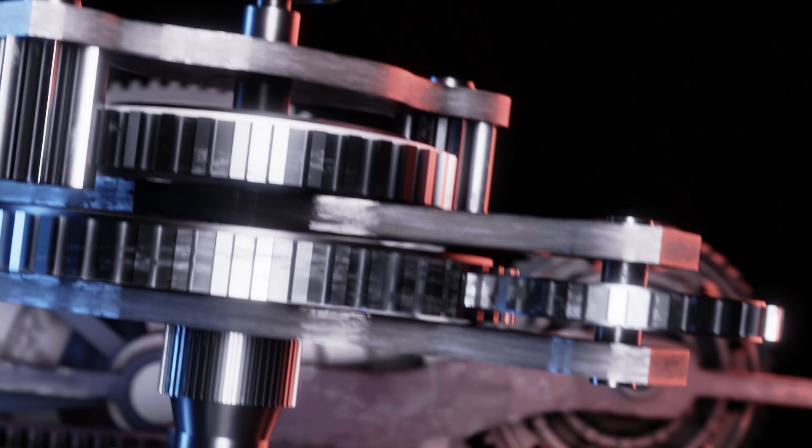There's basically three components to this kit. First is the gear cores. These are all the middle pieces of the gears.

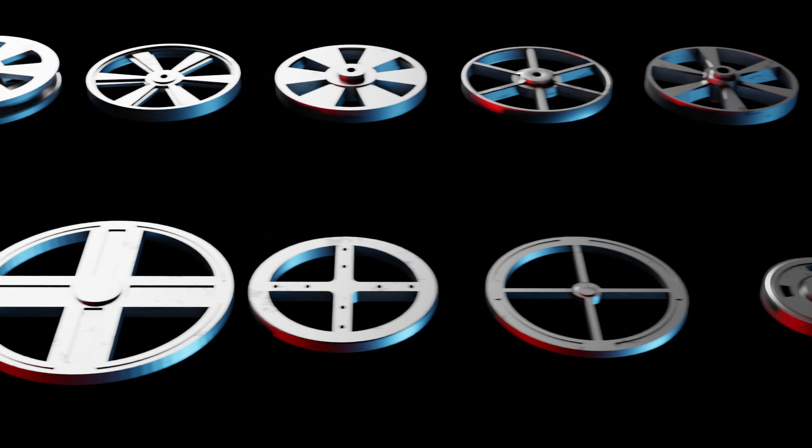I made a whole bunch of different styles based on real world examples that I saw online, and I added a little bit of flourish and fanciness to them to make them a little bit more eye candy. But a lot of these are based on real wheels and gears, with a good variety from sci-fi styles to old-timey gears as well. These are completely scalable and can be any size you want them to be.

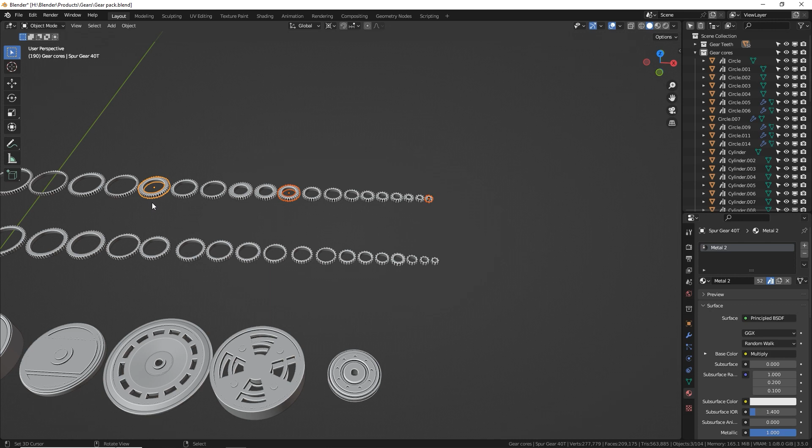Up here are the actual gear teeth. Now these are not really intended on being scaled up or down unless you scale all the teeth that you're using in one scene uniformly. We'll get to the why later. There is actually quite a bit behind gear teeth and how gears work.

So I have made a number of gear teeth here from 8 teeth all the way up to 100 teeth, and I'm going to make some other bigger ones as well for more building possibilities. These are the more classic spiked spur teeth, and over here are the more blocky, smaller square type teeth that you'll find in a lot of industrial applications.

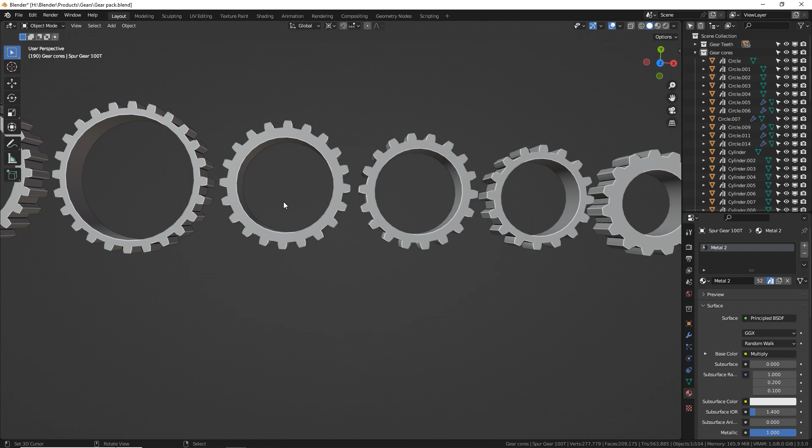So what you want to do is pick your wheel cores first. I'm going to grab a few of these random ones that I really like, Shift D and move them over here. And then I'm going to grab some teeth that I like, and I'll show you how to match them up.

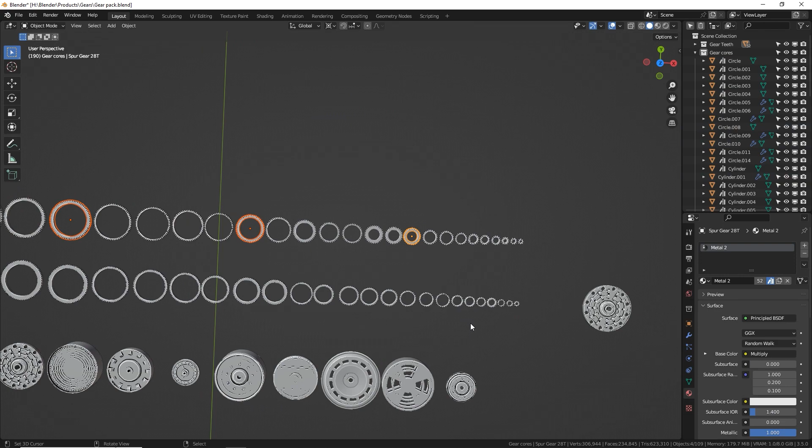I'm going to use the more classical spur teeth, so I'll get a 100 tooth, a medium one, and let's get a small one too. I'm going to Shift D and move these over here. Okay, so I'm going to be building a little gear train over here. Let's just line these up randomly like that.

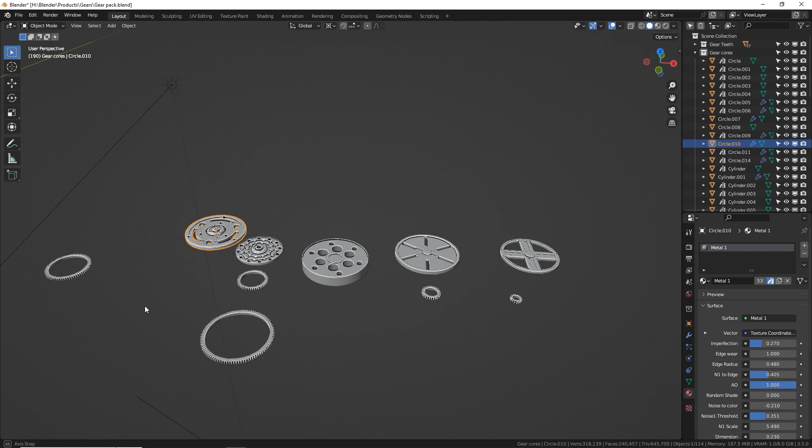Here are some really helpful keyboard shortcuts to help you get things lined up when doing this kind of work. First, you select your target, then press Shift S, and this handy menu pops up. I'm going to go to the bottom one, cursor to selected, so now my 3D cursor is exactly where this wheel core is. Now I want to snap these teeth onto this one, so with the teeth selected, Shift S again, and go to the top option, selection to cursor. Now the teeth I selected are exactly lined up with the wheel.

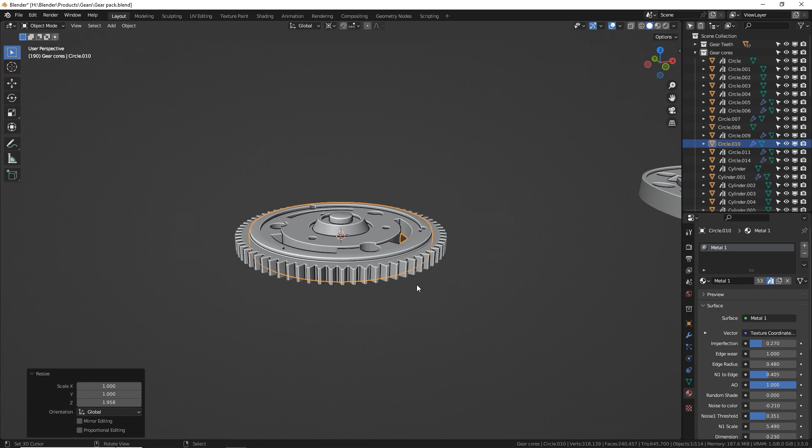Instead of scaling the teeth up like I said earlier not to do, we're going to scale the wheel down to fit inside the teeth. There we go. You can leave it inside, or you can SZ to have it pop up out like that, depending on what look you're going for. I'm going to do that a few more times to attach these teeth onto these wheels.

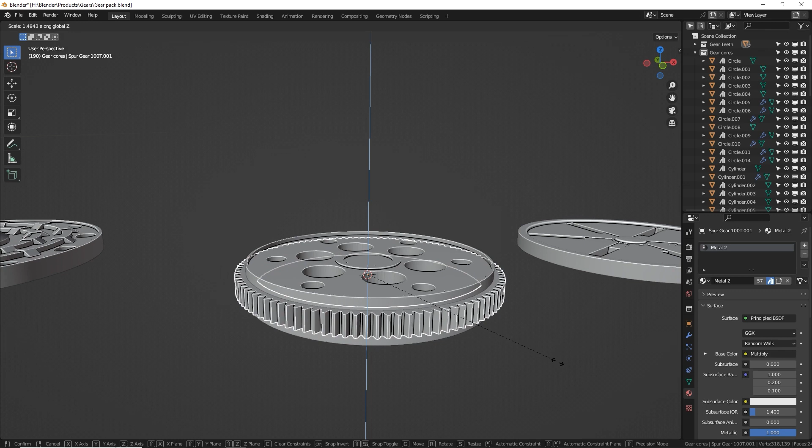Let's make this one the really big one with 100 teeth. So Shift S, mouse on the bottom to put my cursor there, select the teeth, Shift S, select the top one to put my teeth where the wheel is. Then I'm just going to scale my wheel down to match where the teeth is. I'm actually going to scale my teeth up as well, because I've seen on a lot of larger gears they have really deep teeth like that. It also just looks cool.

Let's do similar with the rest of these. I'll speed this part up.

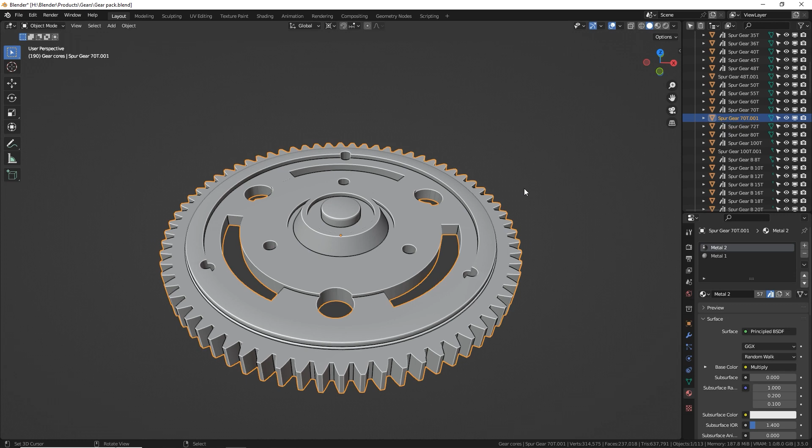Okay, next is we want to join these two objects together, the core and the teeth, so that they are one object. So I like to personally select the core and then the teeth. And when I press Ctrl J to join them, it keeps the name of the tooth object, which shows me how many teeth it has. So 70T, spur gear 70T right here. And also if I press period over here, it'll find it, spur gear 70T. 70 teeth, that's important to know exactly how many teeth you have for the math we're going to do in a little bit with drivers.

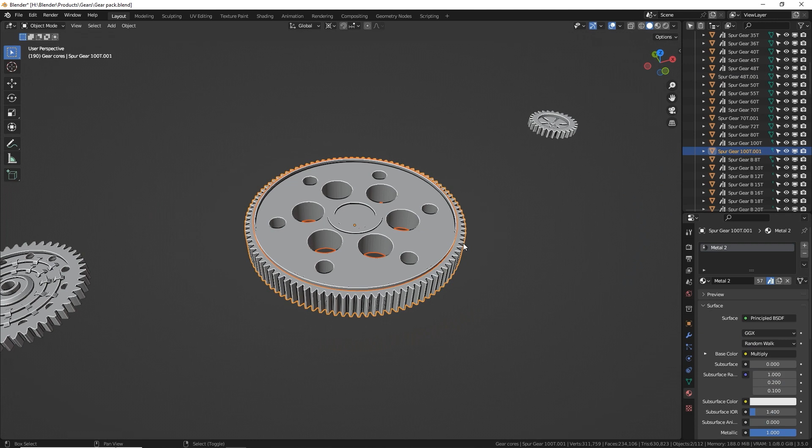It is so awesome and so much fun and so easy to get gears just working. And that's all I wanted to do, is make gears work, and I figured it out. So again, we select the core, then the teeth, Ctrl J to join. Awesome, and it keeps the teeth name. Core, then teeth, Ctrl J, Ctrl J. All right, okay, we have our 5 gears. Let's keep the 100 tooth one in the middle, and let's line up this right there, and there, and there.

Now, once we got them generally laid out how we want, I'm going to zoom in and make sure that the teeth actually line up. So we're just going to move it right there, and afterwards I would build, you know, like a framework or arms or whatever to hold these actually in place if that's what I was going for. But first, I do suggest you do the gears first and then build a framework around them. Or else you'll be doing a lot of extra work.

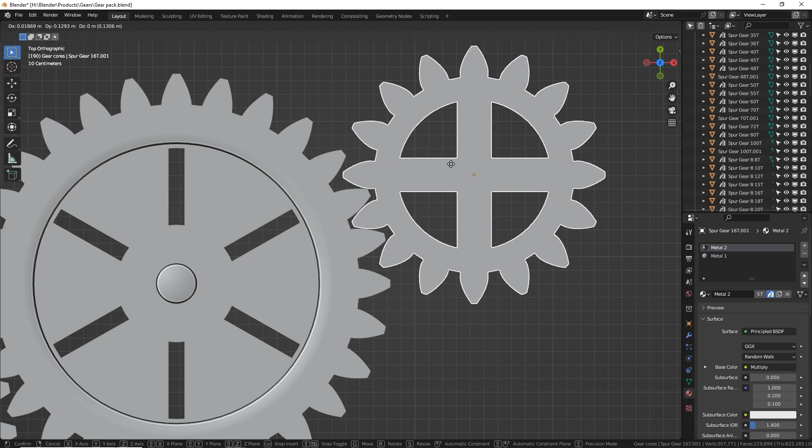All right, so let's automatically animate this as our driving main gear. Right? This is like our starting, where our motor would be connected, our input drive. And to do that, very easy, we're gonna animate it on the Z-axis, right? Because everything is flat facing upwards. Oh, we didn't line this up. Let's move that down, up, and up. Okay, so this is our drive gear.

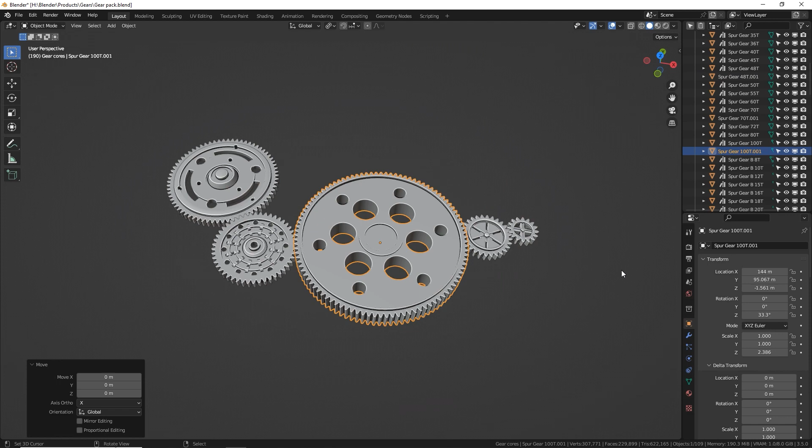So to auto animate it, we're gonna go to the Z rotation axis and type in #frame * .01. So now if we play our animation, it's getting each frame of the animation, frame 1, frame 2, frame 3, and multiplying it by .01, and that is the new Z rotation for that frame. So this will forever animate no matter how long I make this animation, whether I make it 5,000 frames, I don't ever have to do any keyframing or check on it or restart it. It'll just continue to rotate forever, and I love that.

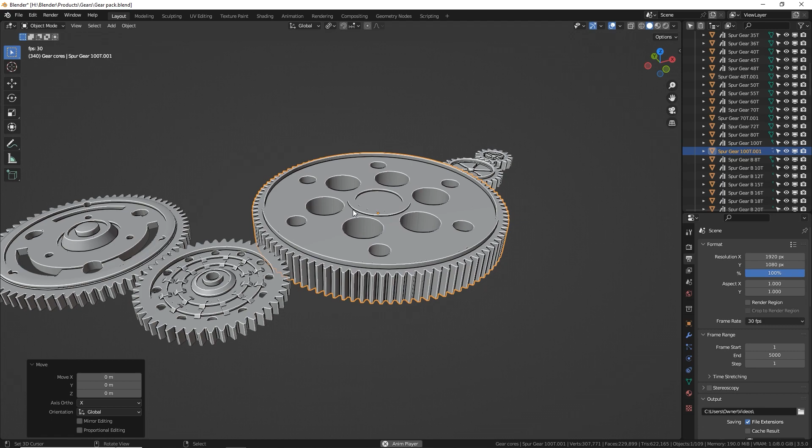Okay, now here's the fun part, and I promise you this is way easier. I tried all kinds of animation for gears. I looked into rigid body physics, and it was just ridiculous. So I dumped that method and moved on. Then I looked into constraints, which is good for copying rotation, but there's limitations to that. Of course, there's always keyframing, but that's manual work, and it's a lot more tedious to get things to line up and the gears to work together.

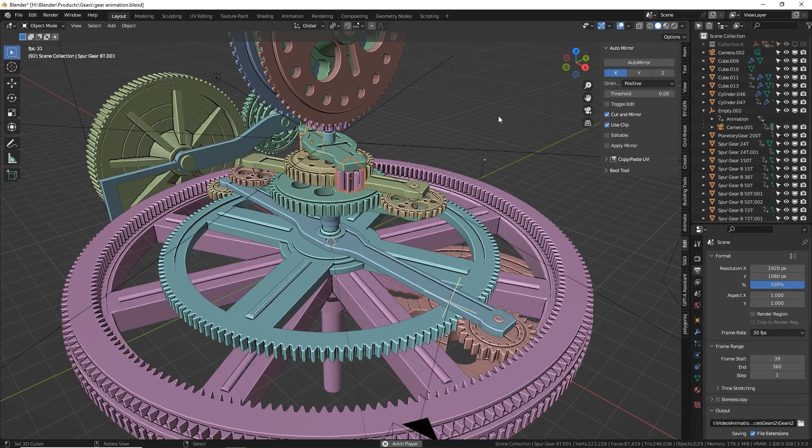And then lastly, I discovered drivers, which is not only easy and low maintenance to set up, but also easy math can be used in the scripting to make everything work with the ratios and the sizes of the gears. And that's where the magic came in. So let's get that going right now. Select your drive gear and go to your object properties. Right click on that Z rotation, and go down to copy as new driver. So one click to copy it.

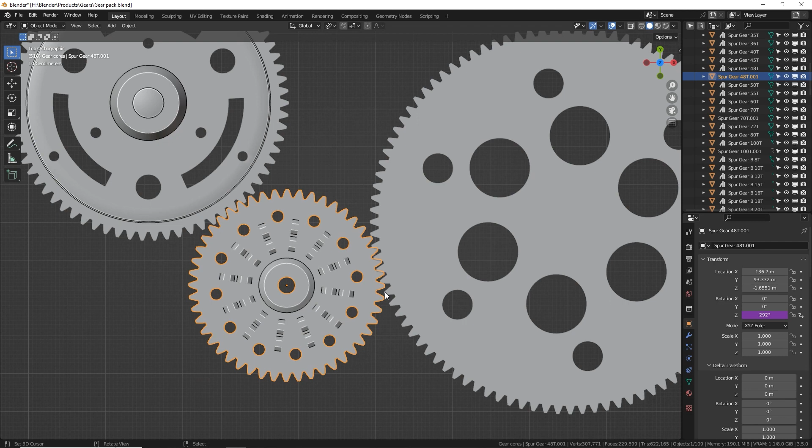Select your recipient gear. I don't know what that's called. Input gear, maybe the output gear. It's receiving, so I call it the recipient. And then go to the Z and right click and paste driver. Now, if I press play, it has the same rotational speed as the input gear, right? This is going 0.01 per frame. So is this one, but that's not correct. Not only that, but it's also not going the right direction.

So we're going to right click on the driver of the recipient gear that we just set up and go to edit driver. Change the average value to scripted expression, which allows us to enter some basic math. And we're going to use some multiplication and division to get things going right.

And don't worry, I hate math. Like, I barely passed pre-algebra in high school. So trust me, I don't like math, but this is super easy and you may appreciate learning a thing or two.

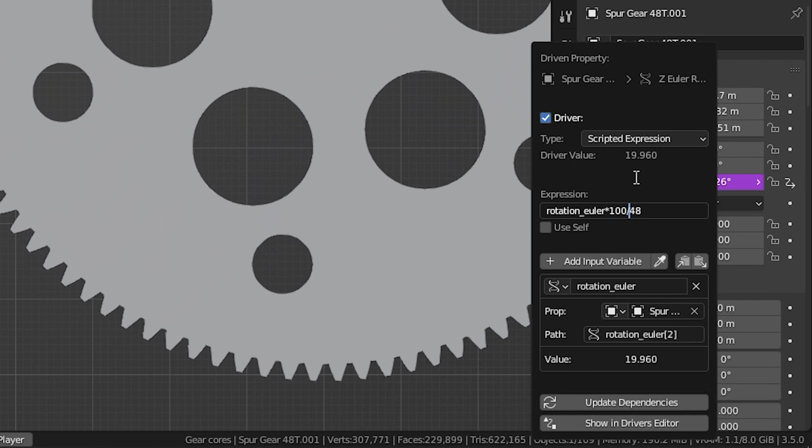So we're going to look at two things before we type in our math. We're going to look at how many teeth this gear has, which was 100, and how many teeth this gear has, which is 48. That's important. So go back to edit driver. We're going to multiply this rotation from input, the big wheel, by 100 divided by 48. And let's go back and put a negative, a minus sign. So it's basically multiply that Z rotation by negative 100 divided by 48.

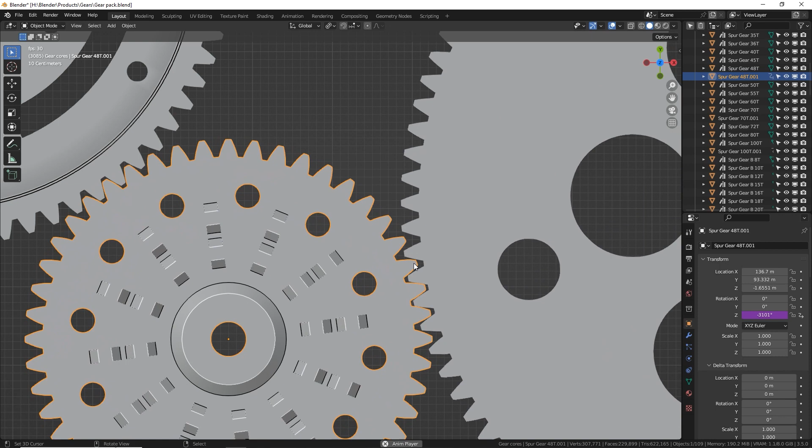And look at that. Right when I hit enter, bam, perfect teeth interlocking. It just works like real gears do. The ratios are perfect because it's math. And the teeth are working together because they're all uniformly designed. These teeth are specifically made to work together. I used to make gears in Blender. I will never do that again. Blender needs some work with the gear creation add-on that it comes with. It's good for fast stuff, but it doesn't have accurate gear teeth.

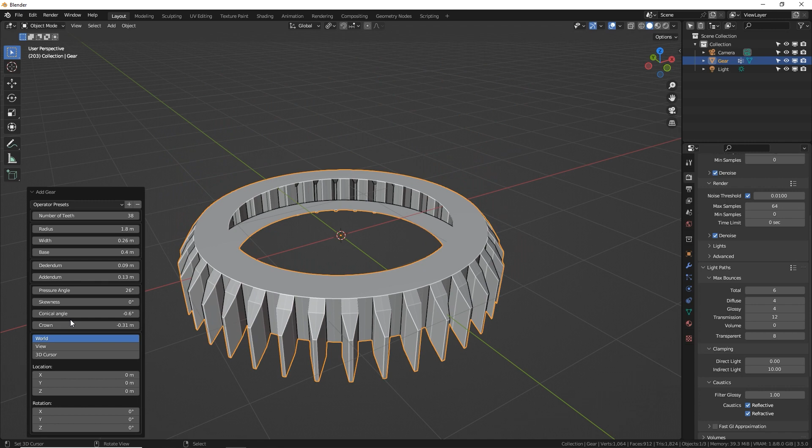And check this out. It's also non-destructive. I don't know how this works, but in my object settings, if I go down, look, I can still adjust the teeth. Watch this. If I change my number of teeth, look at that, it's updating. Now, I'm not going to do that because it's messing everything up, but you can go back and totally change these teeth settings, and that is just incredible. Wow. Okay, so we got one gear going.

Now let's do that same process again. Now this is the drive gear and this is the recipient gear. So select your drive gear, scroll up, find our Z rotation, which you can see is changing before our eyes. Right click, copy as new driver, recipient wheel, right click, paste driver. Now this is 48 teeth and this one is 70 teeth. So on the recipient wheel, let's right click and go to edit driver. Let's do that same thing.

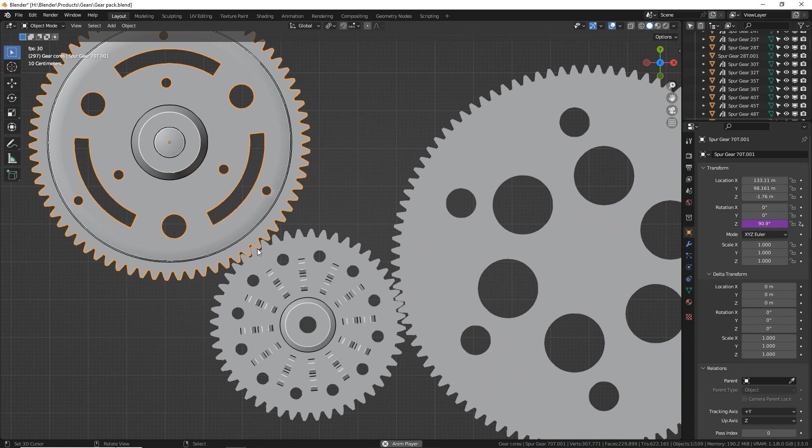We change it to scripted expression, which allows us to enter math, times 48 divided by 70. And it's going the wrong direction, so I forgot to add my negative sign in there. Let's throw a dash in there, negative. There we go. Awesome. 48 divided by 70 gives us that perfect gear ratio. Now let's go over here. Things are going to be speeding up, right? Because big gear to small gear means the small gear goes a lot faster.

So let's copy as new driver. Let's paste that new driver right there. And this is going from 100 teeth down to 28 teeth. Edit driver, scripted expression, multiply by negative 100 divided by 28. Boom. Awesome. So it's going almost 4 times as fast. This one over here is going to go a little faster.

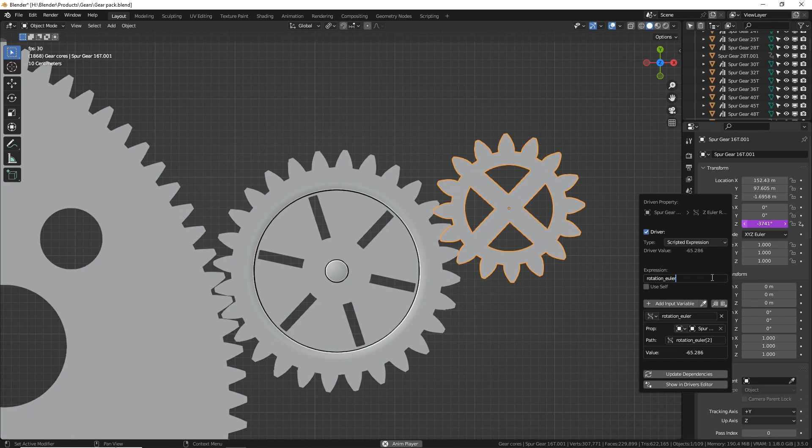This is 16 teeth. So from 28 to 16, copy this gear as new driver, go to the recipient and paste. Right click and go to edit, scripted expression, multiplied by -28 divided by 16. Awesome. There we go.

Now when the gears get spinning really fast, it's going to look like the cores are going at a different speed than the teeth. All that is just a frame rate issue. Don't trust your eyes, because if they're spinning really fast, you can't tell. Watch, I'll speed this thing up. I'm actually going to increase my drive gear speed, which is this one, from 0.01 to 0.1.

And yeah, things are going really fast. Over here, it's hard to tell. Let's make it even faster, 0.4. Things are just going crazy. And that's another cool thing, is I can adjust the speed.

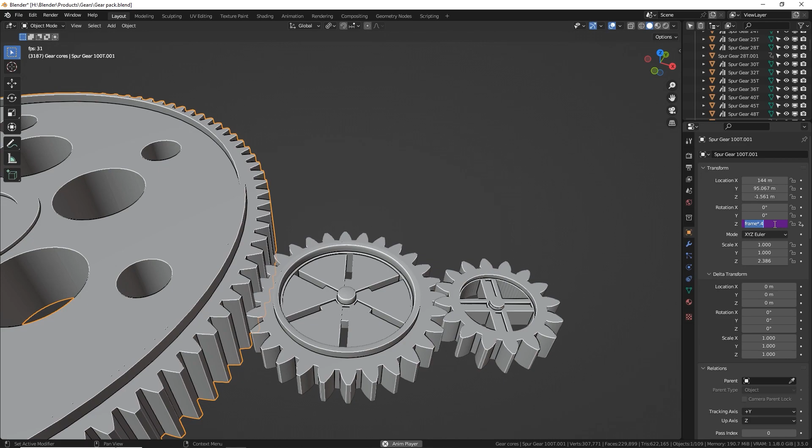Watch this. If I delete this driver, look, all the other drivers are still there. So watch this. Isn't that cool? I can keyframe if I want. I can add a clock ticking keyframe, which uses keyframe modifiers to do this kind of thing. And everything else responds. That's awesome. To do that with bones or rigid body physics or constraints, it's just a pain in the butt. So you're welcome. This is the easiest, best method I've found for gears with interlocking teeth.

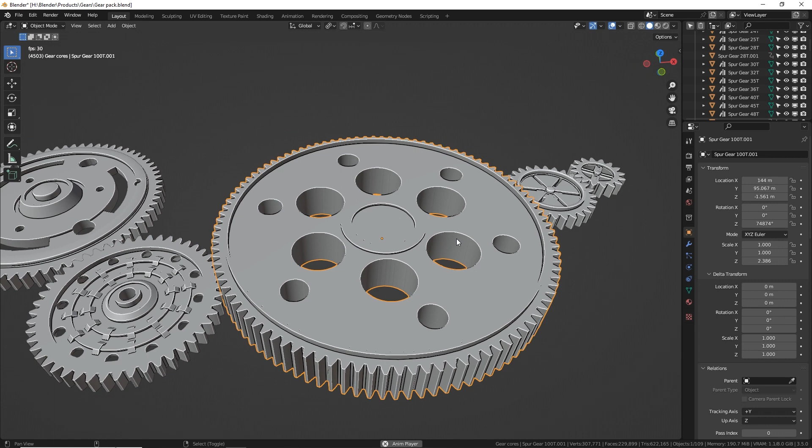All right, so the other part of this kit that's awesome is the materials. So far, I have only made 2 beautiful materials. I think I might make a third one just for fun. I'm going to make this gear just metal 2, whereas this gear will only be metal 1. Okay, so metal 1 is a beautiful procedural material. Let me let it render for a second so we can actually appreciate the quality here. And I'm going to start tweaking this and show you what all it can do.

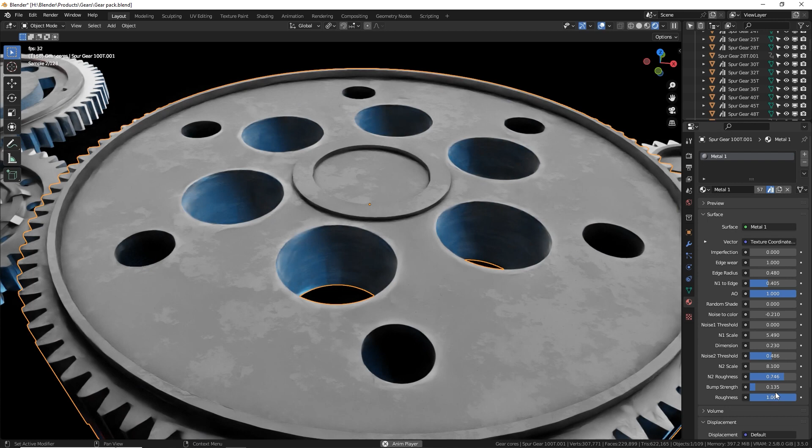So if you go to the material tab, this is all a big detailed node group that allows you to adjust everything from edge wear, noise and bump, metal corrosion, and ambient occlusion, and much more. So let me set this all kind of back to the basic here, where there's nothing really happening. All right, so the heart of this procedural material is actually 2 BSDFs, which all have procedural noise. There's no image textures being used, although you totally can if you want.

And the crossfade between these 2 materials, the flat metal and the reflective metal, is being controlled by a whole bunch of awesome sliders. All this you don't need to worry about. You don't ever have to touch this because of the node group that I made, which you can edit right here in the material tab.

So if I increase the imperfection slider, we're going to begin to see the shiny metal popping through the surface. We can control the threshold of 2 different noises that have different styles to them. And now we're seeing the shiny metal pop through. If we lower our threshold even more, there's going to be more holes showing the shiny metal. And now it's more shiny than not.

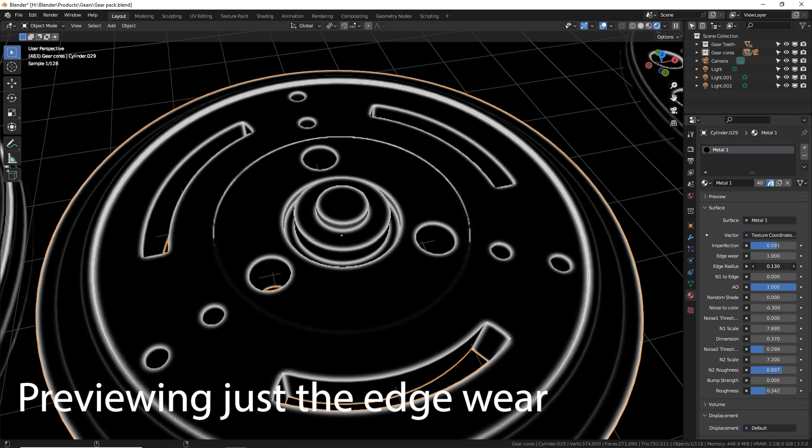But if you want a cleaner gear, you can do that as well by just kind of turning down the imperfection and having these noise things just more of a subtle touch to add some irregularity so that things aren't perfectly shiny and smooth. Like so.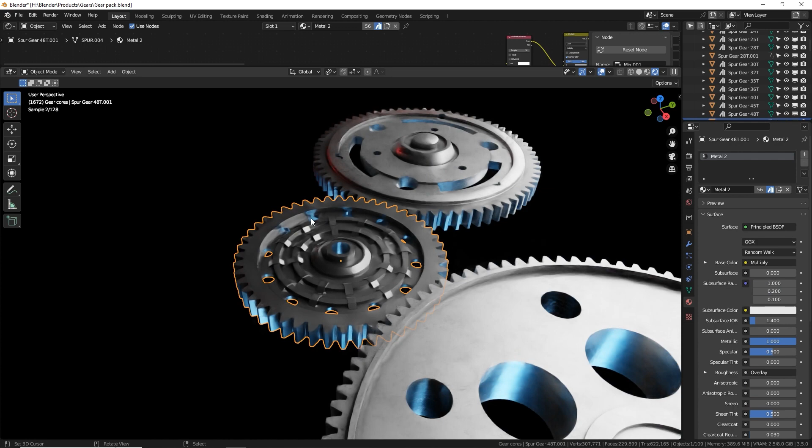There is another material included, which I have called Metal 2, which is much, much simpler. There's really not a whole lot of nodes going on. Just this right here, an ambient occlusion node into a color node, which allows you to set a color if you want. And there is some noise being layered on top, which you can control how much noise is added to offset the roughness, so it's not a perfectly reflective surface. You can get some grit there depending on how dirty you want your gear to be.